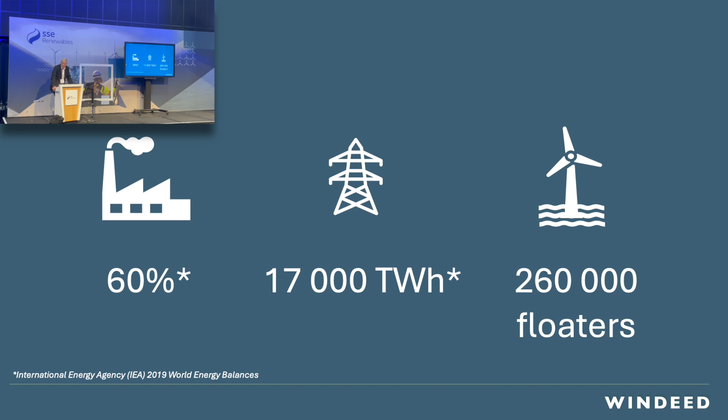The massive amount of units needed means deploying thousands of floaters each year, and the numbers are mind-boggling. 60% of electricity comes from fossil fuel generation, equating to 17,000 terawatt-hours per year. That means we need to fill that with 260,000 15-megawatt floaters. If we go to net zero, we're up to 1 million of those.

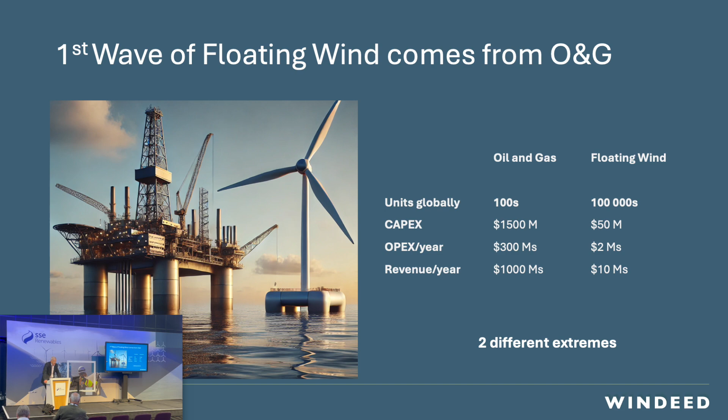Now, the first wave came from oil and gas. We have imported enormous good knowledge from the oil and gas industry. However, the character of that business is completely different—you can see the numbers are several orders of magnitude apart, with a short payoff time. So on one side we have project business, and on the other side is series production. The second wave is stemming from the other extreme: mass production.

We're a little bit provocative in telling you that we think there are three myths keeping the first wave alive. If we need to dramatically reduce LCOE—not talking about 10, 20 or 30%, but down to a quarter of today's level—we need a system design that addresses all the cost items in the very initial design phase. It's not possible to reach that level only by incremental improvement, the same way a flat TV was not incrementally improved from a thick, fat TV.

The second myth is that standardization is the answer, but it's not. You can't standardize on something that isn't commercially viable and is far, far off. You first have to reach something where all the requirements are fulfilled, and then you can standardize on common denominators.

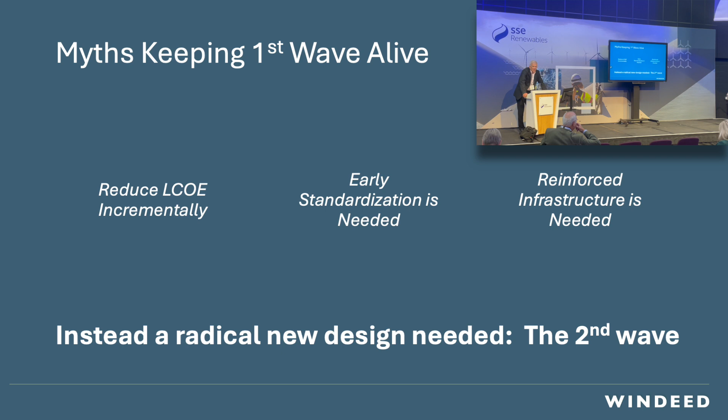And finally, putting a lot of money into reinforcing infrastructure is a waste of time and money. If you invest in storage, port reinforcement, dredging, shipyards, fixed cranes on the quay—that's not needed if the design doesn't require this.

To really make floating wind competitive, we have to look at all the wants, needs, and requirements, and all these can be lumped into three main enablers. The first is reduced weight of the floater, including performance. The other is series production, which includes the entire process from factory to final installation.

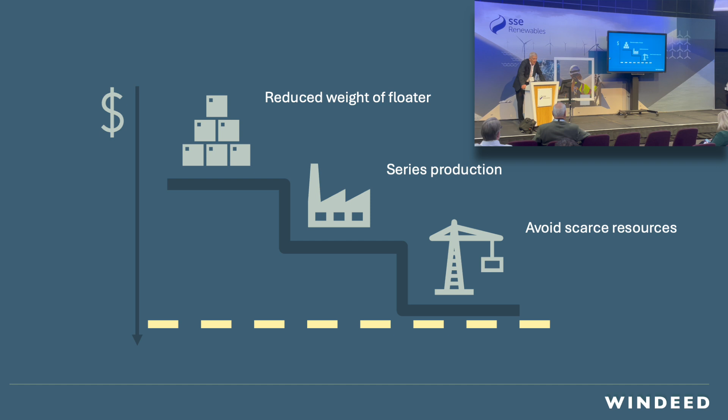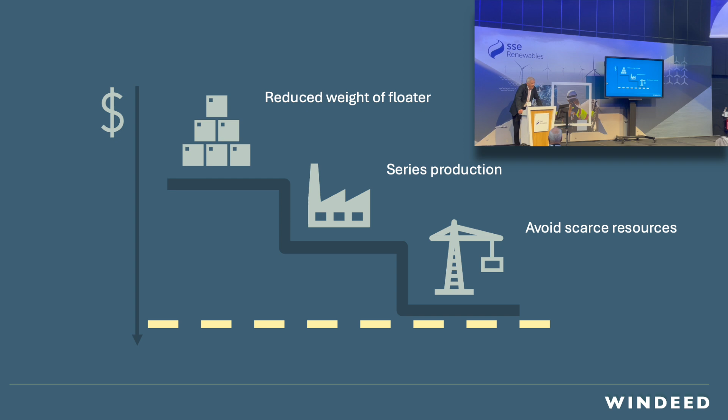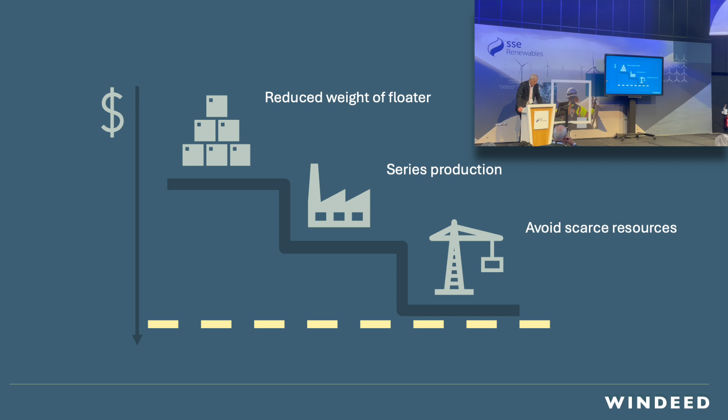One of the biggest roadblocks we have is scarcity of resources. If you depend on shipyards, there's no way we can manufacture this at scale. If you depend on chain, there's no way you can have enough capacity. The important thing is to avoid dependency on scarce resources, because those will always raise prices.

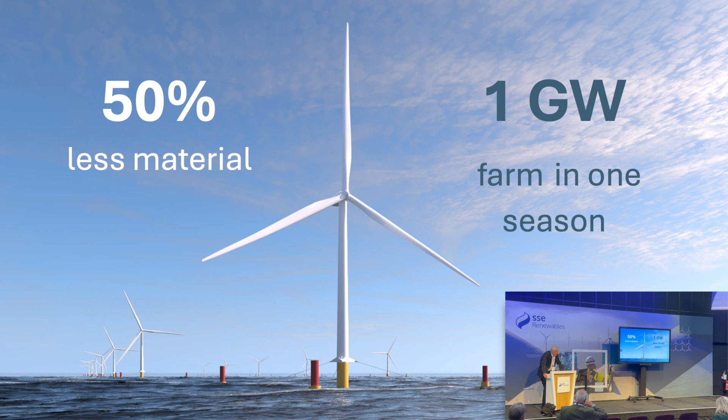And there's a result you can see here—we just mentioned a couple of them. The reduction that Windeed has achieved is 50% compared to the average of what we see elsewhere. And it's a contradiction to lower the weight and still have slow motion.

That is achieved by an extremely small waterplane area. The fast speed resulting from penetrating and refining every single process results in a 1-gigawatt farm being installed in one season. That includes, for instance, only a 2-day assembly of the floater.

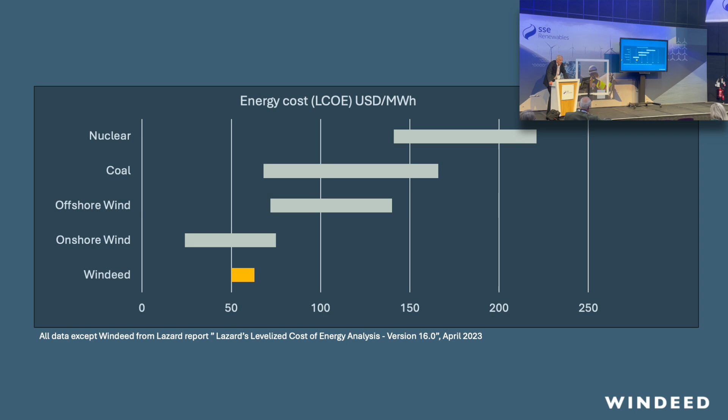There are a lot of other aspects in the system, and one of the most important might be the mooring system, which isn't always well focused on—but that is half of the problem. So we think it's possible to reach the necessary level, getting down to a quarter of today's cost, and even come on par with land-based wind, and we can substantiate it.

Now you will see a short video of a tank test. I'd like you to look at the tower motion because these are very extreme conditions. The acceleration of this nacelle is only 0.25 G in the 50-year conditions, which is even less than some monopiles. So there's virtually an immunity to wind and hydrodynamic loads.

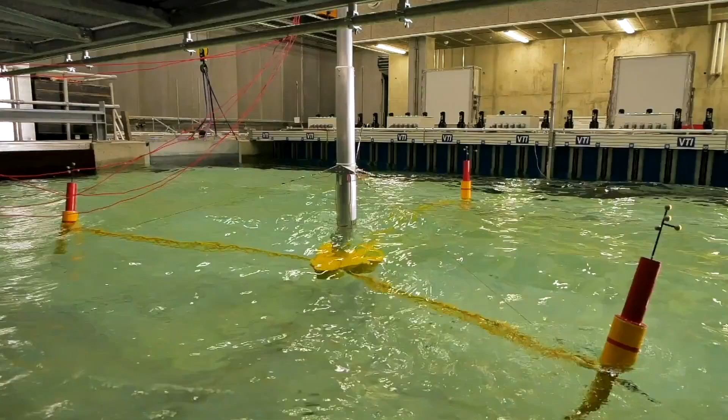It's important to mention this is based on proven components—nothing very exotic here. It's at the system level where we achieve these results. Here we have 23-meter waves, current, and 40-meter-per-second wind concurrently.

So, summarized: this is designed for mass production, like an IKEA bookshelf, based on proven components and avoiding limiting constraints. The target—which is possible—is to come down on par with land-based wind. This is, of course, verified by third parties, and the amount of extensive simulation has been enormous. We've used both Flex and 3D Float.

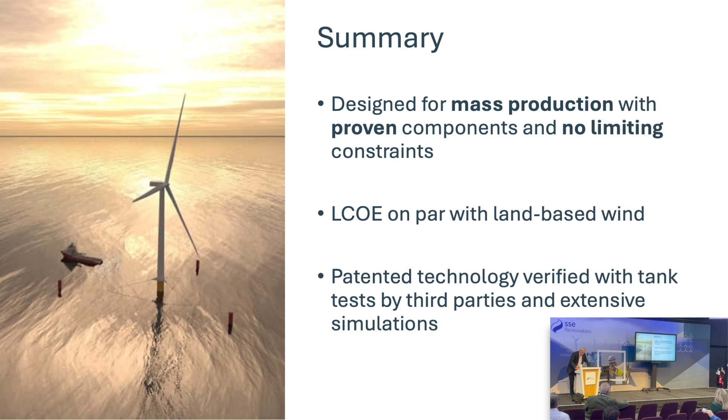Now the final picture: is this Europe's last chance? Europe is a dwarf in renewables. If you look at the diagram, Mario Draghi is right—we need to invest substantially, but we don't. We don't invest in technology.

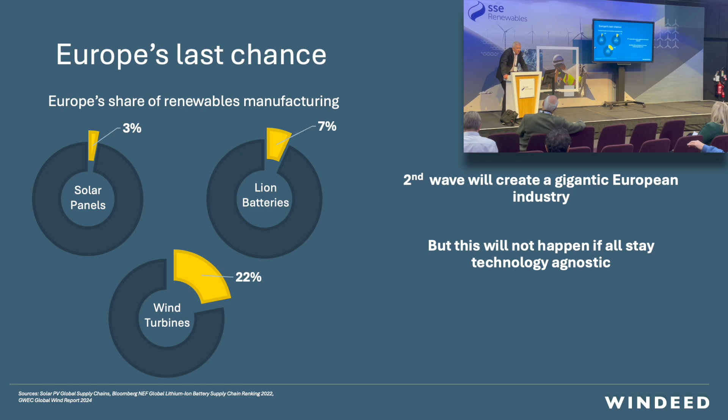The UK has pioneered the floating wind market and set a world-class benchmark. Europe has the world-leading engineering competence in floating wind. So it's possible to create a gigantic industry, 10 times bigger than the railroads, bigger than the oil and gas industry. But there is one problem: this will not happen if all the companies with deep pockets just stay technology agnostic. Thank you very much for listening.